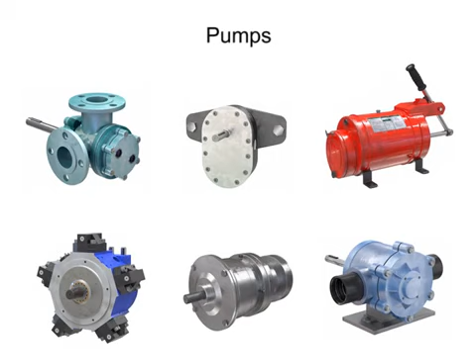Many different types of pumps exist to assist fluid movement in a variety of systems. An external gear pump uses two gears rotating against each other to provide fluid movement.

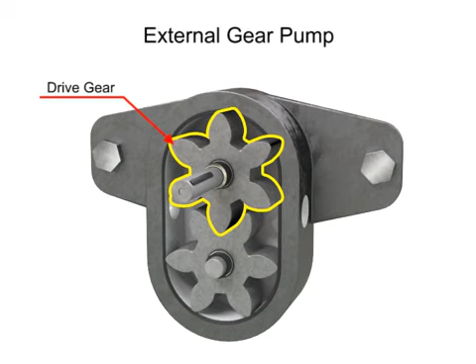One gear is driven by a motor connected to a shaft. This is called the drive gear because it is driven by a motor, and it in turn meshes with and drives the movement of the second gear.

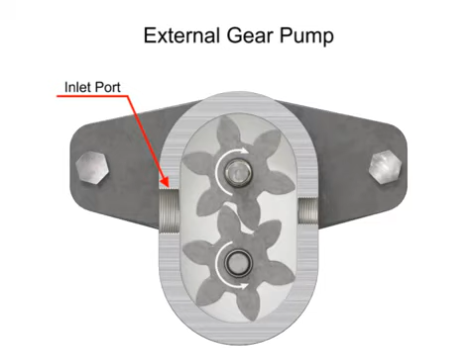As the gears rotate away from each other and come out of mesh, they create an expanding volume on the inlet side of the pump. This creates a vacuum at the inlet port, allowing fluid to flow into the pump. Then fluid flows into the cavities and is trapped by the gear teeth.

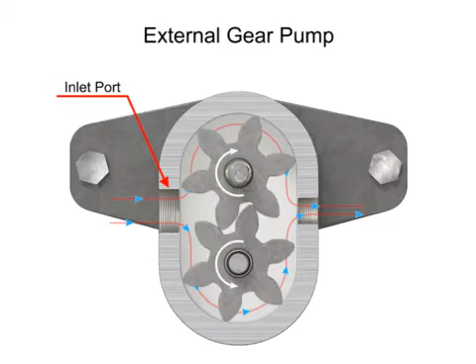As the gears rotate, a flow path is created around the outside of each one. Fluid trapped in the slots between teeth is carried around and discharged into the cavity with the outlet port. Meshing of the teeth in the center of the pump seals the outlet port from the inlet port. No fluid passes between the gears.

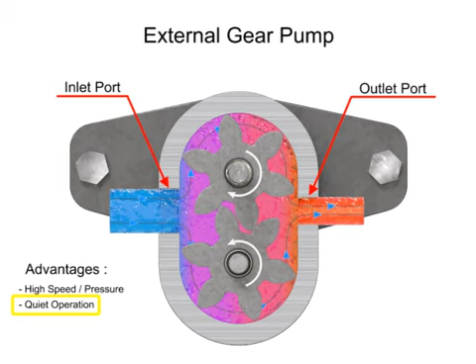The advantages of external gear pumps are their high speed and pressure, relatively quiet operation, and that their design accommodates a wide variety of materials. Disadvantages include bushings in the liquid area can become worn and that they have fixed end clearances.

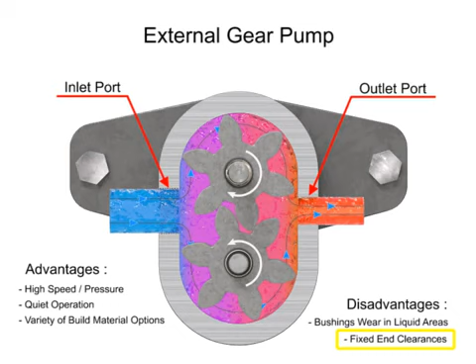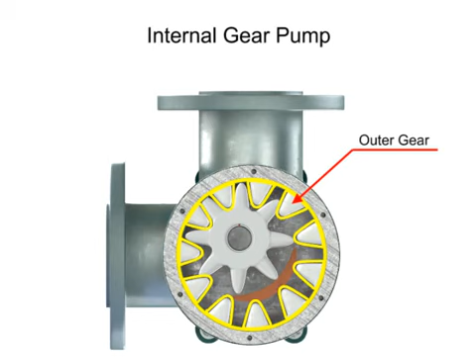Internal gear pumps are exceptionally versatile. This type of pump has one inner gear which is inside a second outer gear. The inner gear has a shaft driven by a motor and has teeth that protrude outward. The outer gear has teeth that protrude inward toward the center of the pump.

As the inner gear rotates, it meshes with and moves the outer gear. Liquid is trapped in the gear spaces and carried from the inlet to the discharge. A stationary crescent-shaped divider separates the intake and discharge portions of the fluid.

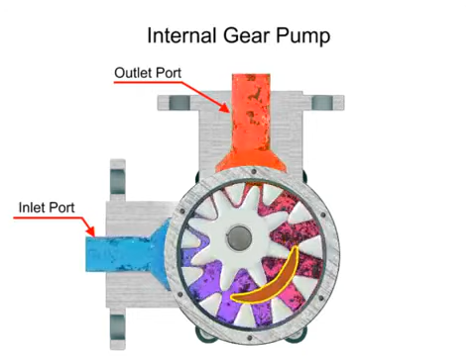Advantages of internal gear pumps are a smooth and almost pulseless flow, and slightly more horsepower for its size. Disadvantages are its higher cost, limited size range, low to moderate pressure ratings, and few sources of manufacture.

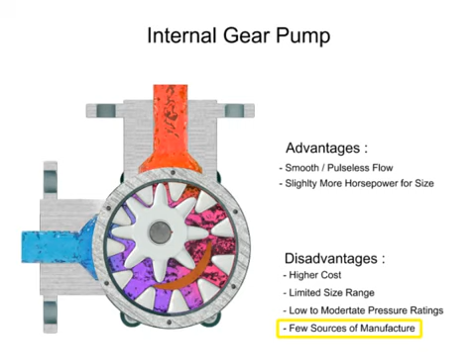A rotary vane pump is a positive displacement pump that consists of vanes mounted to a rotor. The vanes are on an off-center drive shaft. As the shaft rotates, the variable length vanes slide in and out to maintain contact with the pump housing. The tension in the vanes is maintained by either springs or hydraulic pressure. As the vanes rotate, they create chambers of varying sizes within the pump.

Fluid enters at the largest chamber. As the vanes rotate and retract, the chambers get smaller, forcing fluid to exit through the discharge port.

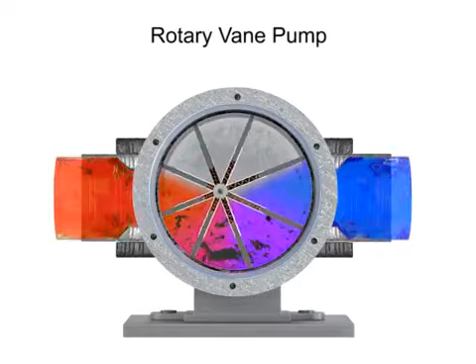The advantages of vane pumps are that they can handle low viscosity fluids at relatively higher pressures, can dry run for short periods, and develop a good vacuum. Their disadvantages include complexity and their unsuitability for both high pressure and high viscosity fluids.

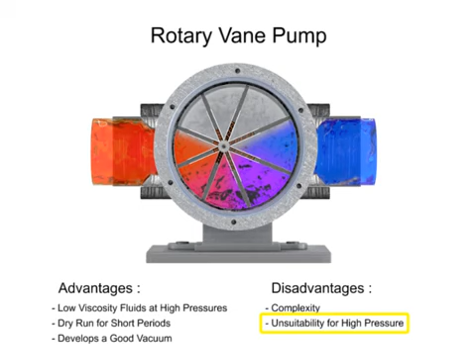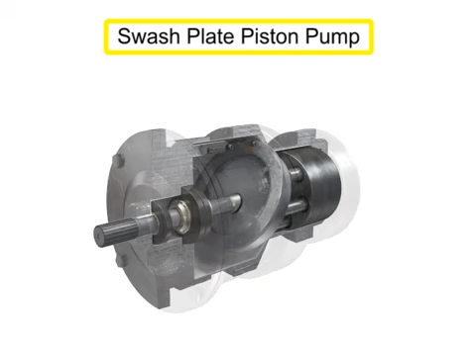Piston pumps come in many different forms. A swash plate is a device used to translate the motion of a rotating shaft into the reciprocating motion of a piston.

Swash plate piston pumps have a rotating shaft connected to a cylinder block containing pistons, which are pressed against a stationary swash plate that sits at an angle to the cylinder. As the shaft rotates, the pistons move against the swash plate, causing them to reciprocate within the piston block.

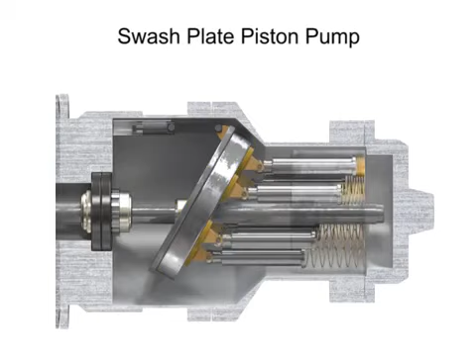The pistons create a vacuum that forces fluid in during half a revolution and expels fluid during the other half. On the intake stroke, a spring ensures the pistons pull back and maintain contact with the swash plate, causing fluid to fill the empty cavity left behind.

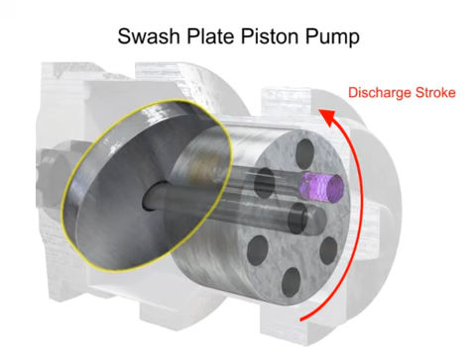On the discharge stroke, the angle of the swash plate forces the pistons back inside the piston block and discharges the fluid. The greater the slant on the swash plate, the further the pump pistons move and the more fluid they transfer.

Piston pumps, in general, are manufactured with closer internal fits than other pumps. This means that internal slippage can be less so that they operate with reasonable efficiency at pressures both too high or too low for the operation of other pumps.

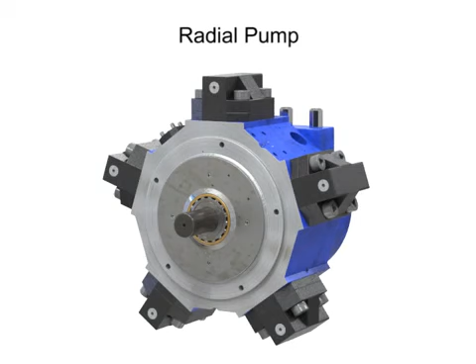Radial pumps are designed so the pistons stroke in a direction at right angles to the shaft. The pistons are arranged like wheel spokes around a cylinder block with an eccentric central cam mounted on a drive shaft.

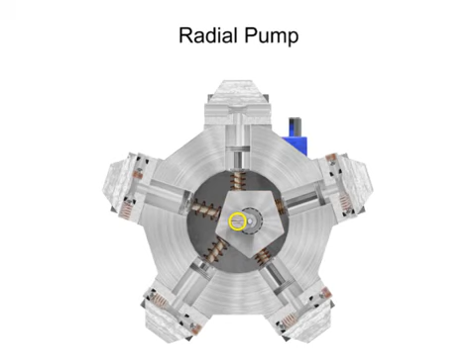As the shaft rotates, the cam moves towards the pistons, forcing them down into the cylinder block and discharging the fluid. As the cam moves away, springs help retract the piston and cause the intake stroke. Check valves ensure that fluid only enters the inlet ports and only exits the outlet ports.

Radial piston pumps have a low noise level, very high loads at low speeds, and high efficiency.

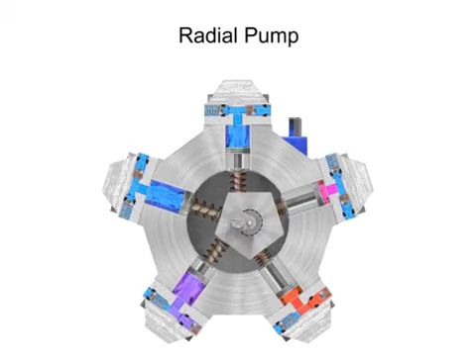Hand pumps are used when a source of power is not available or where the extra expense of a power pump isn't warranted. For example, they are used on shop presses and other portable equipment, serve as standby pumps, and serve as sources of emergency power.

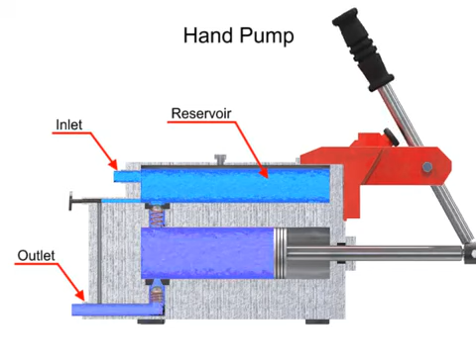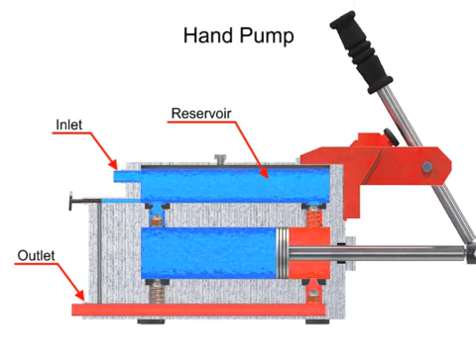Hand pumps are always of piston type and are usually constructed with a piston working between two check valves. Double-acting hand pumps are more efficient, allowing fluid to both enter and discharge on both strokes of the piston. Moving the pump handle in either direction allows fluid to be drawn in from the reservoir and discharged via the outlet ports. Check valves in all locations prevent fluid backflow.